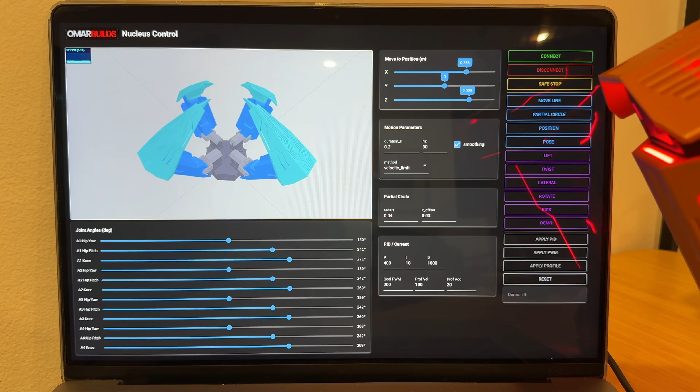I didn't want some simple claw grabby thing that fell out of a cereal box. I wanted something that looks like magic. Check out how smoothly it spins the globe. The fingers move exactly where I tell them to, within 2 millimeters. They're coordinated, actually better than real fingers. And it makes me look like I want to take over the world. My own Evil Claw robot.

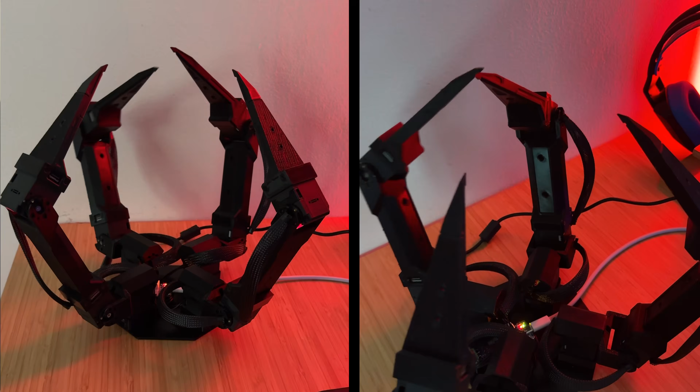But God, it sucked. It took weeks of trying to stop it from freaking out, redesigning the same part 5 times because it kept ripping itself apart, relearning high school maths, and then finally getting the fingers to work together. This might seem like a lot of effort just to have an Evil Claw robot on my desk, but it's the first step into turning myself into Doc Ock.

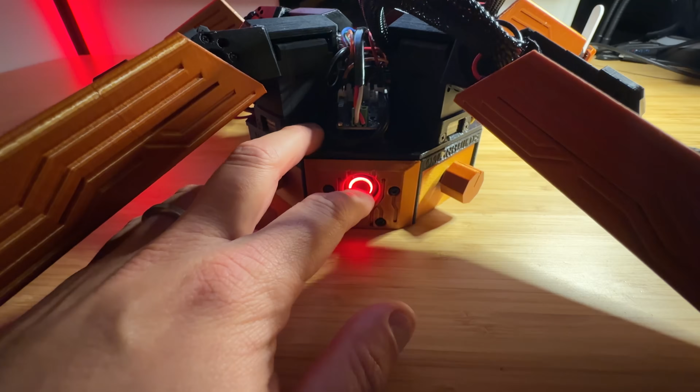Oh wait, no. It's going in the wrong direction. There we go.

To build this claw, I'm going to start with a design that already works well and is real: a robot called Axis. Wow, projectors are bright.

This is stupid. These are my 3D printed titanium sunglasses. Check out this link if you want a 3D print your own.

This is Mark Setrakian, and Setrakian's from the fucking future. Mark Setrakian is a robotics expert. He has a robotics company and he's even competed in Robot Wars. He built Axis as a robot to rotate a globe, showing that robots can have fine-tuned dexterity and that robots can be art itself. I'll be mixing Axis with the art from Doc Ock, plus some of my own style to make something a bit more original for my own build.

What are you looking at?

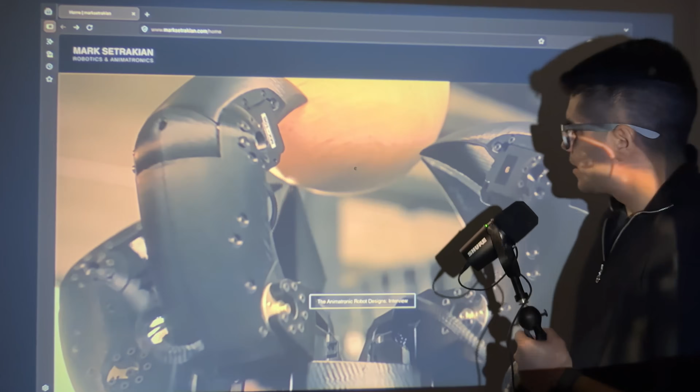Now, Mark uses 5 fingers to rotate his globe, whereas we really only need 3 points of contact to hold up an object like this, and a 4th finger to rotate it. So that means only 4 fingers instead of 5. You would think that makes things easier. So that means I need to model up 4 fingers, 12 servos, the electronics to control it all, and a base to mount everything together.

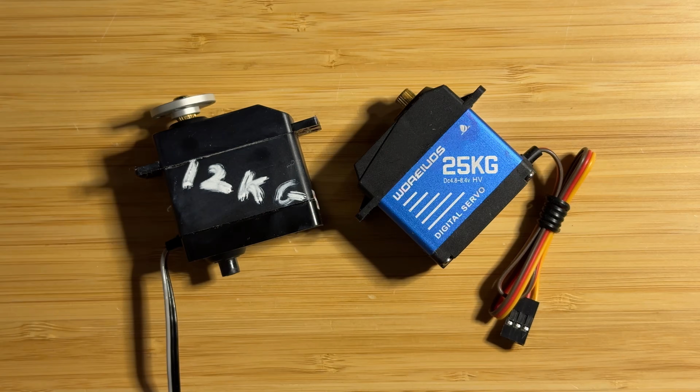Speaking of servos, the ones Mark uses are the MX106 from Robotis. Yes, I'm in the closet, don't question it. They're industrial grade and not meant for hobbyists, so they're made with metal gears and put out almost 10 Newton meters of torque, or 100 kilograms per centimeter. For comparison, most hobby servos put out between 12 and 25 kilograms per centimeter. They also combine the DC motor, controller, driver, sensor, reduction gear, and network all in one tiny package.

But there's one major problem: they cost almost 1,000 Australian dollars each. Wait, does that mean that Axis cost at least $12,000 in parts alone? What the fuck? I can't afford that, so I'm going to use the XL430 instead.

They're also made by Dynamixel and are part of their low cost range. They have most of the same features, but are weaker, made of plastic, and most importantly, only $85 each. What the fuck are you, I said not to question!

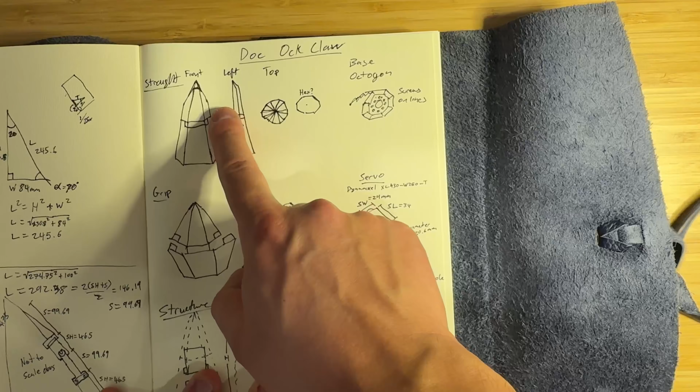So now that I've got my servos chosen, let's sort out the dimensions. I want each finger to be able to touch each other at the very top, to match this look from Doc Ock. Future Omar here: if there's anything I regret about this project, it's the decision I just made here. I don't need the fingertips to touch at the top, but now that they do, it causes so many other problems. Whatever, I'll explain at the end, you'll see what happens.

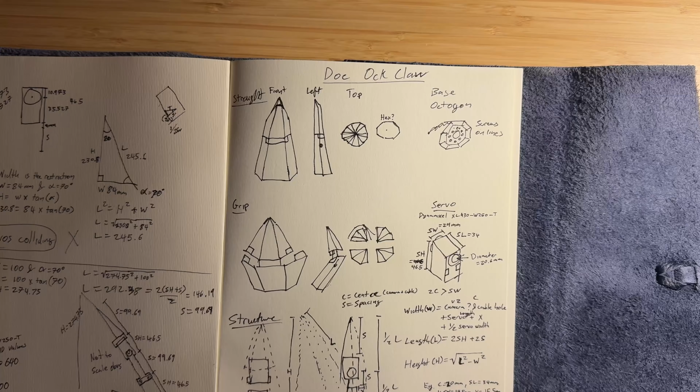I also wanted a little space in the middle to allow for electronics and the limited cabling. To round things out, this length will total 100 millimeters, and using some trigonometry, I can figure out the rest of the dimensions. Each link needs to be precisely 99.69 nice millimeters. Let's get to designing in Fusion.

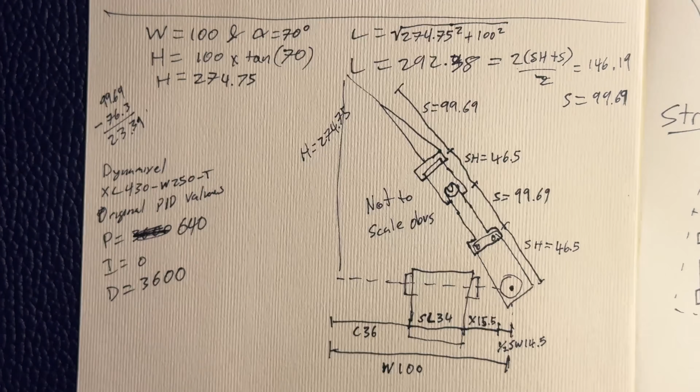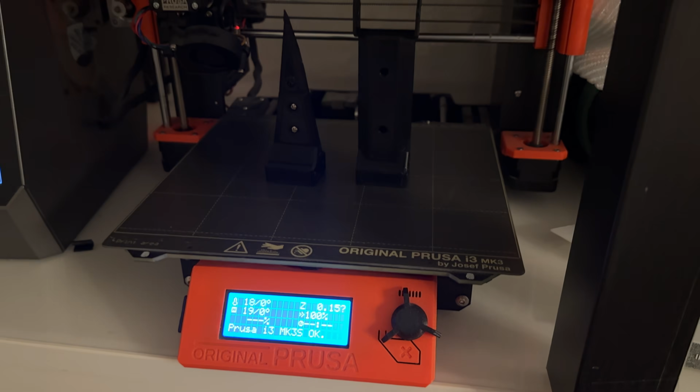There won't be much weight at the top, so simple links the same size as the servos should do. The servos themselves will be the weak points anyways. But I do want to add some Doc Ock style shielding to the outside, so I'll add some mounting holes for later. 3D print it out, put it together, and now we got a finger.

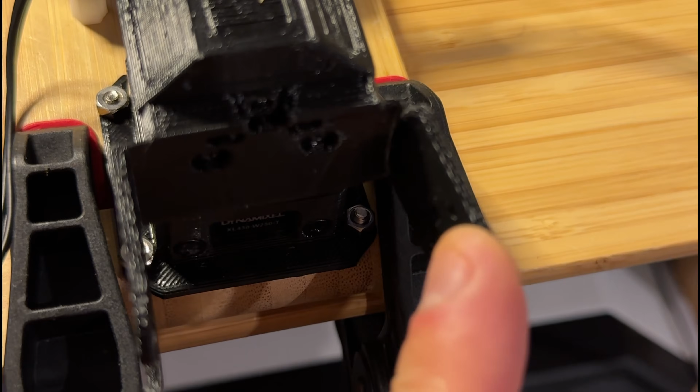Inverse kinematics is pretty awesome, but this is what happens if you tell it to try and reach a point that the robot physically cannot reach. It's called the singularity. It's around this time where I found out how fragile certain parts of my robot are, so I had to beef up a few links.

As for the singularity, we've fixed that the same way as everything else we've been fixing so far. A little more code. By the way, we're still not done yet. There's still other stuff we need to solve for.

If we go from one point to another, the servos will move to their new positions quickly. But in most cases, the tip won't move in a straight line, as the motors will all move as fast as they can to their new angles. Some will only need to twist a short distance. We need to plan each movement and create a series of positions with timings locked in.

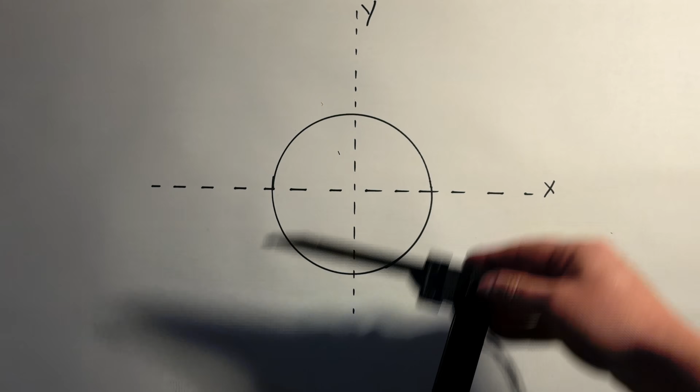This is called path tracking. Since we're rotating a globe, we want the points to follow a circle. This means for each finger, we need to plot the movement points in an arc. This is the shape that will allow the robot to twist in a circle. In this case, we'll have each finger move just under 1/3 of the way around.

To be absolutely certain of where the tip is, we'll first ask each servo what angle they're at. Then we'll use forward kinematics to derive where the tip is in space. Then we'll map out the arc along the XYZ axis.

But once we get to the end, we need to get the tip back to the starting point without dragging the tip against the globe. So we repeat the action in the opposite direction, but with an offset in the x-axis, away from the globe. Also, with 4 fingers, we need this reverse action to take 3 times faster than the normal movement. Add in a smoothing effect so the tip doesn't shake all over the place, and we've got 1 finger sorted.

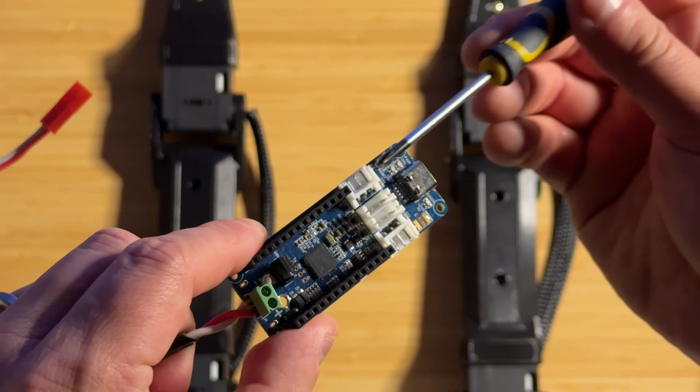Time to sort out the rest. Now that we have 4 fingers, I'll need a new board to control them all. This is the Open RB150 and it has 4 ports, 1 for each finger. The coding should be easy.

I'll make all 4 fingers do the same movement using the same code. I'll offset each finger by 1/4 of the cycle, so there's always 3 fingers in contact with the sphere and a 4th is moving back.

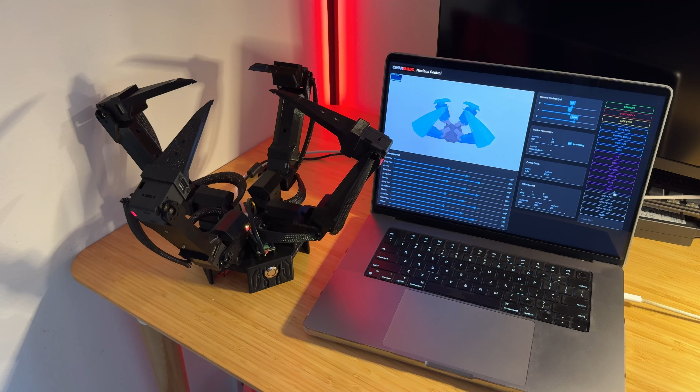I even expanded the software so I can easily control all the motion parameters and PID settings for the servos. It's still running on Python, but it's all controlled by this website, so I can see what it should be doing. It can even be remotely controlled.

But there's one last thing to get right, and that's the exact specifications of the globe. Wait, do I have to measure the exact diameter of this globe and figure out exactly which latitude I'm going to stick the claws on? Nah, stuff that. We're going to make this guy dynamic.

What I mean to say is that there'll be inputs and outputs. And actually, you know what I don't want to deal with anymore? A computer that's connected to it all the time. So let's just do a massive software migration from Python to C++ so that I'm running everything from this little board. Moving it all here means I can use potentiometers, otherwise known as knobs, on the side of the robot.

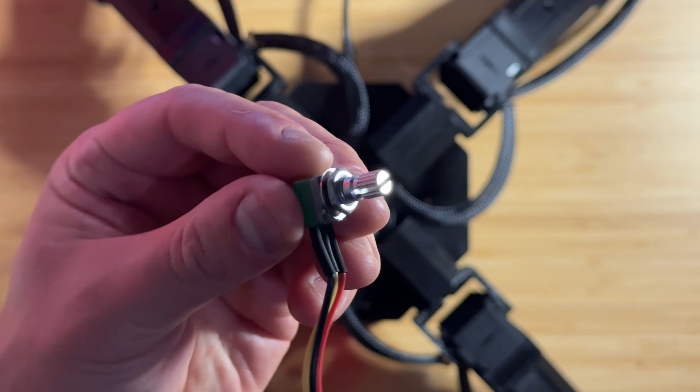Want to make it higher? Turn this knob. Want to make it go faster or reverse the direction? Turn that knob. Knobs for everything. Actually no, just 4 knobs, thanks. Using these knobs instead of the computer means I don't have to be specific. I just have to adjust the parameters I programmed in, and eventually it'll be good enough.

Enough about knobs. Another side effect of converting all the code to C++ is that I'm no longer using the robotics toolbox for Python anymore. Sorry guys, your work is no longer being used. Anyways, are we done? Nah.

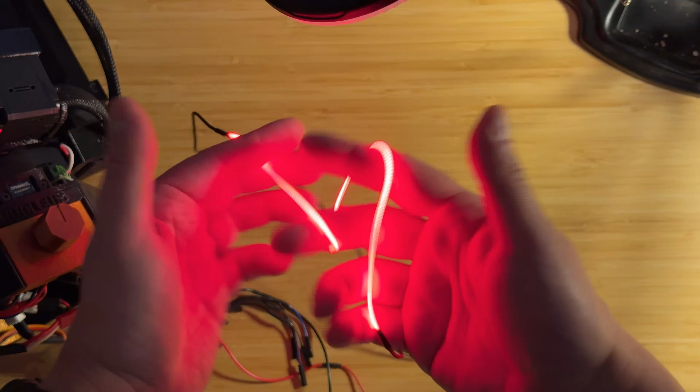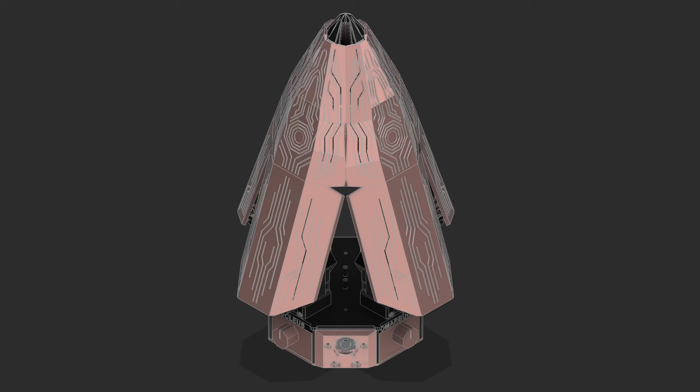There's one last critical thing that we need to take care of: making it look sick. I've designed the outside shield layers and the base to reflect the nature of this robot. I grew up playing Halo, so I'm borrowing a few design elements from there, plus of course Doc Ock from the Spider-Man movies. Just like his claws, these shields will act like armor to protect the sensitive insides.

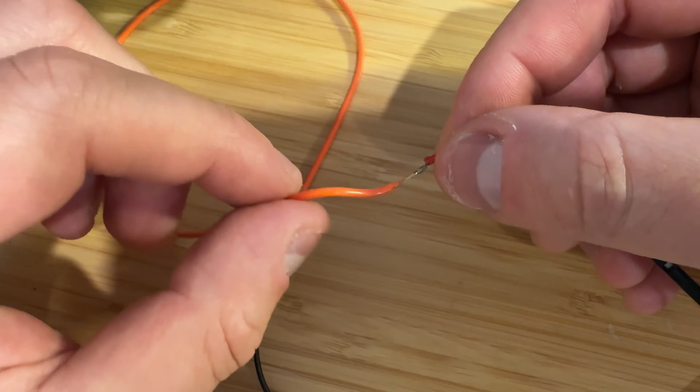I also designed in these LED filaments, partially because I wanted a reason to play with LED filaments, but also because it looks amazing lit up on my desk in red. I went through a couple of iterations and broke a few filaments along the way, but at this point I just want the project to be done. Keep in mind these LEDs and shielding are important, but also I'm not letting the idea of perfection ruin good enough. With all that finished, it's time to see its final form.

Remember how I said there's a problem with the fingers? Now that it's fully finished, let's see what it could have done better. First, the geometry looks off compared to Doc Ock's claws. There's a gap at the bottom here that if I closed up with the shields, it would look comical when it was open and it would probably collide with each other.

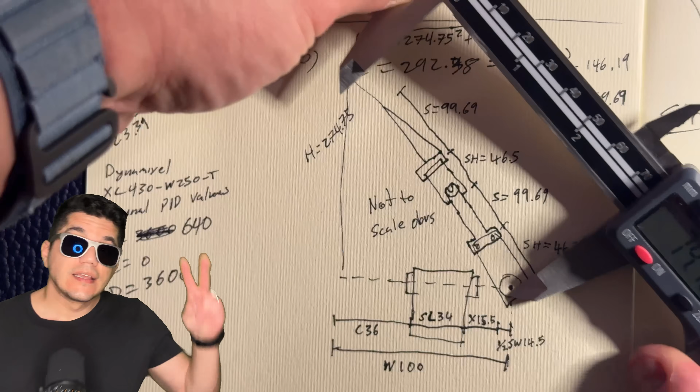Second, the length of the links means that every little mistake or inaccuracy results in a much larger mistake down the line. The servos aren't perfect and each of them has their own variability, which means the globe doesn't spin cleanly. Now these two problems could be solved by using smaller servos and then shrinking the base as a result, and therefore using smaller links for the fingers.

But the servos would likely be weaker, and this leads me to my final problem. I posted this short around this time of the project, and I got a few comments about how this kind of looks like a Leaper from Arc Raiders. And fair enough, when I turn it upside down, it kind of does.

But the weight is too much for the motors because the fingers are too long. It can stand here on its own power, but it's definitely not steady, and I can even smell the motors getting hot too. Doing some quick maths, each of the servos for the links of the fingers can only output 1 kilogram of force if the servo is 90 degrees away from the ground. If I made each of the links shorter, maybe by about 25%, then it would be easily able to handle its own weight, and each of the fingers would probably be more accurate too. But that wasn't in the original design requirement, so whatever, that can be in the next project.